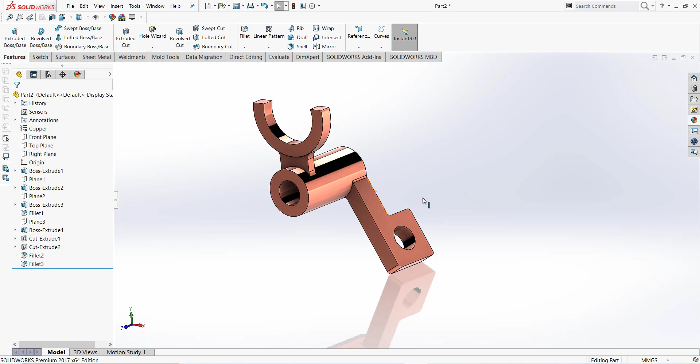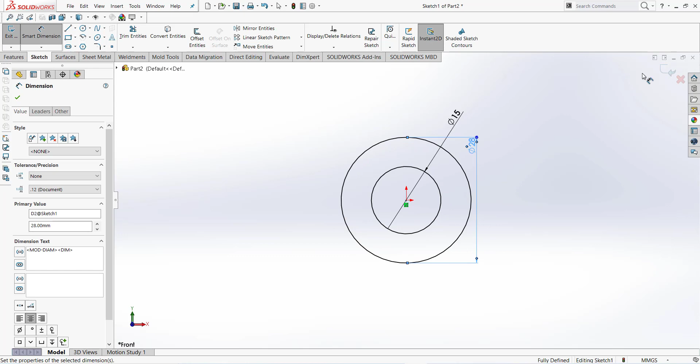So friends, firstly we draw this portion, after that this one, and this portion is our last portion. Kindly note the dimension: this is 28, 15 and 50 millimeter. Just take a plane and draw two circles. Dimension this is 15 millimeter and this one is 28 millimeter. Finish sketch, extrude 50 millimeter. First portion is ready.

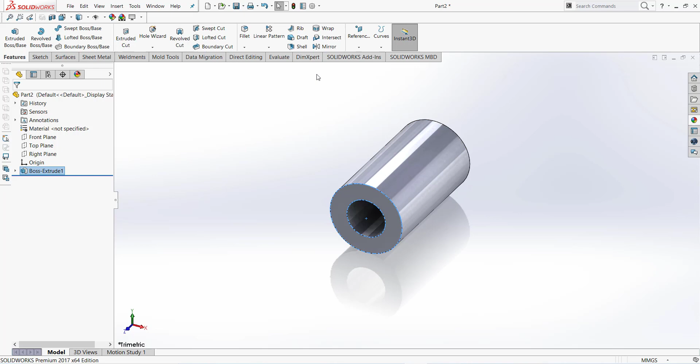Now we are going to make this portion. This is center 45, 50, 35 and 7 millimeter extruded from this portion, 6 millimeter from this face and 5 millimeter from center. Just take a plane, click on this face and take a plane, flip direction and 6 millimeter.

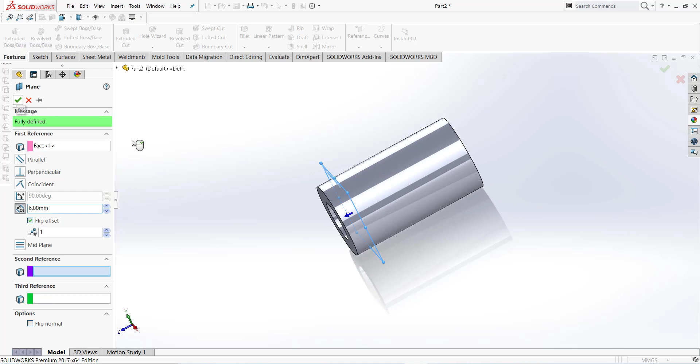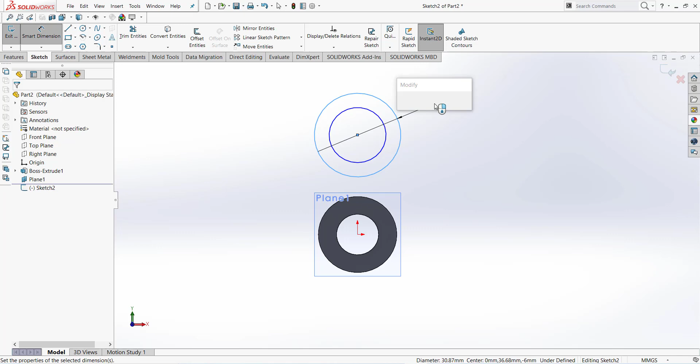Now go to plane 1 and normal to, and take sketch and draw two circle. Smart dimension, this is 50 and this one is 35. Center distance is 45 millimeter. Now draw a center line, offset 5 millimeter upper side.

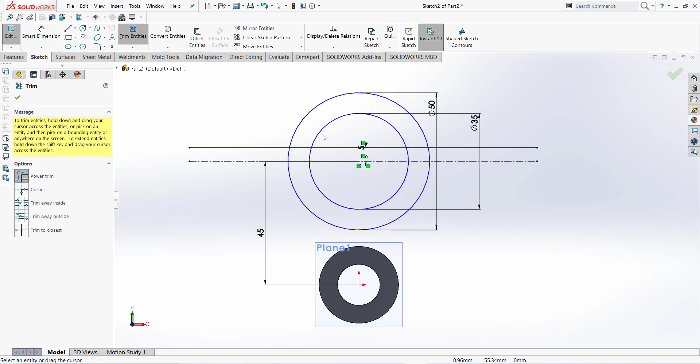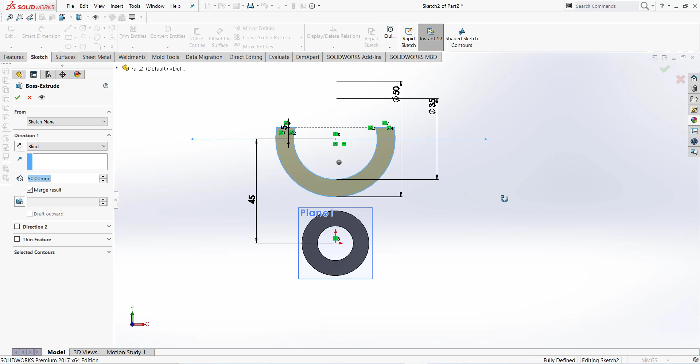Now go to trim the extra portion. We have to fix this, should be vertical. Finish sketch and go to extrude, flip direction and distance is 7 millimeter.

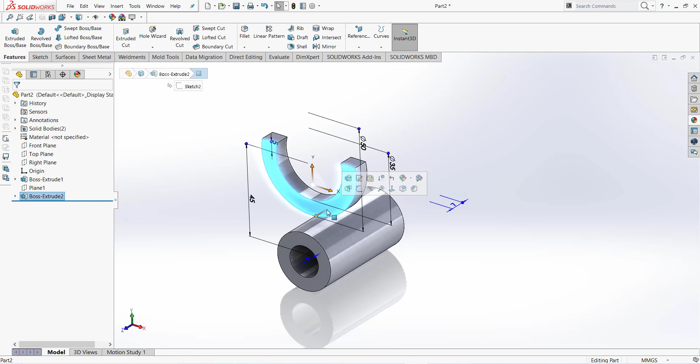Now we are going to make this rib. This is 5 millimeter thickness, so we have to take a plane. Hide the plane. First click on this face and take a plane, flip direction 1 millimeter. Go to sketch and click on sketch, click on this plane and convert the entities.

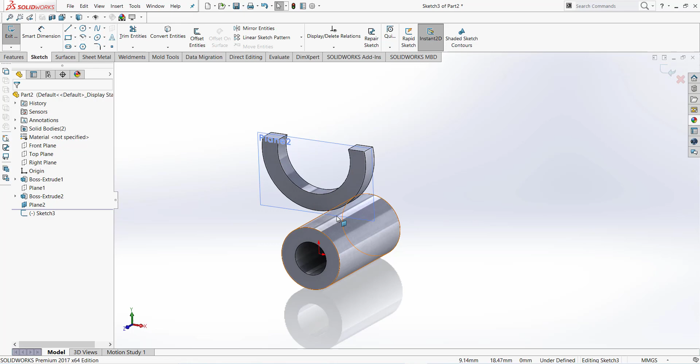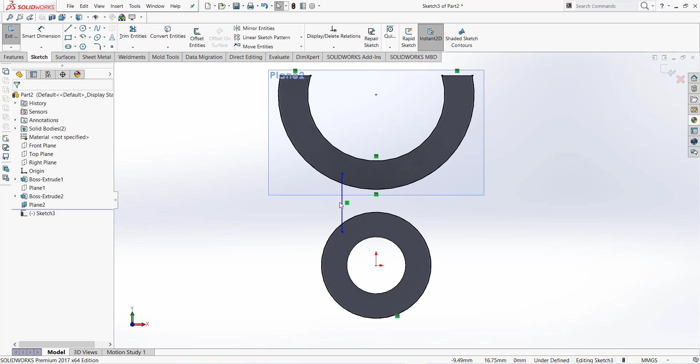First click on both faces and convert entities. Sketch 3 to be normal and draw line, it should be vertical. One more line. Now dimension, this dimension is 10 millimeter and total dimension is 20 millimeter.

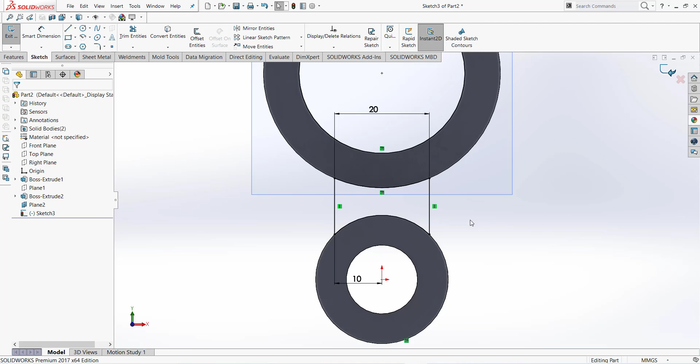Now trim the extra portion. Finish sketch, go to feature and extrude, click on this sketch, flip direction and distance is 5 millimeter and OK. So our rib is complete.

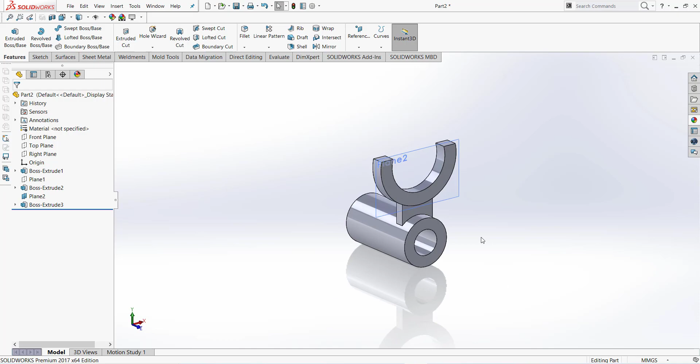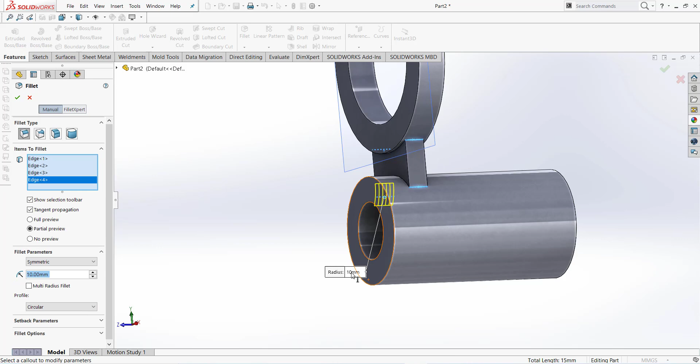Now 5 millimeter radius from both direction, let's make a fillet. Click on this face, this edge and this edge, this and this one. Distance is 5 millimeter and click OK. Now hide this plane.

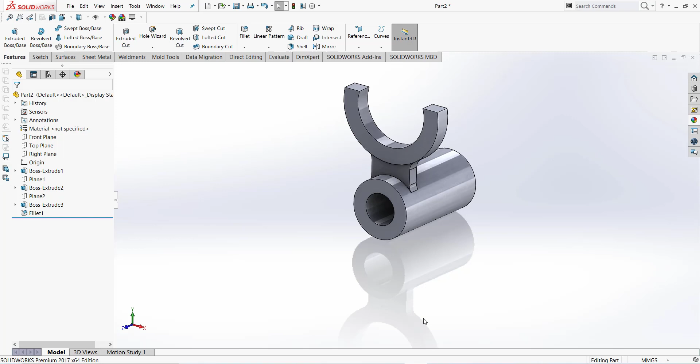Click on this face and take a plane, flip direction and distance is 38 millimeter. Click OK. Plane 3 and normal to.

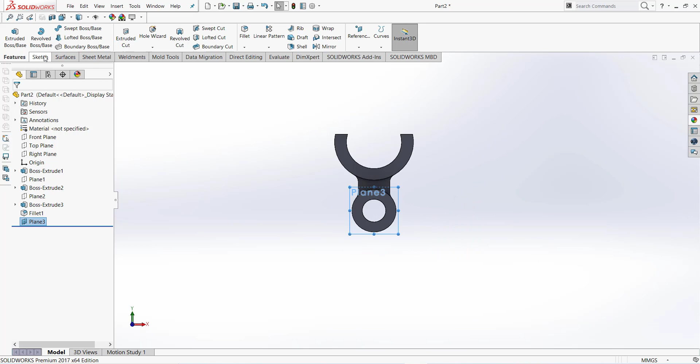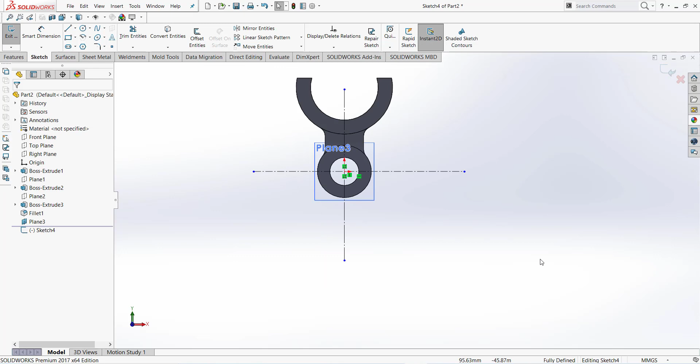Now go to sketch and draw some center lines. One vertical center line, it should be construction. Now one more center line, it should be construction, and the angle from this vertical is 30 degrees.

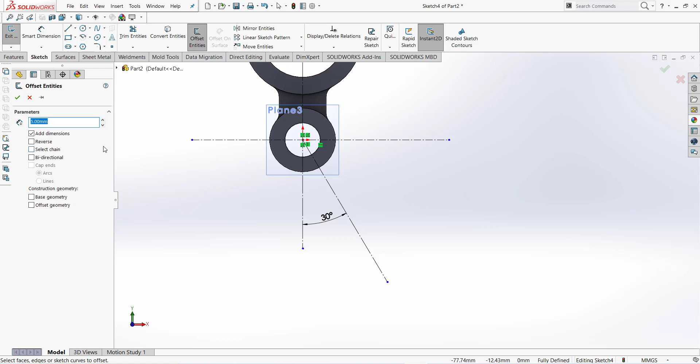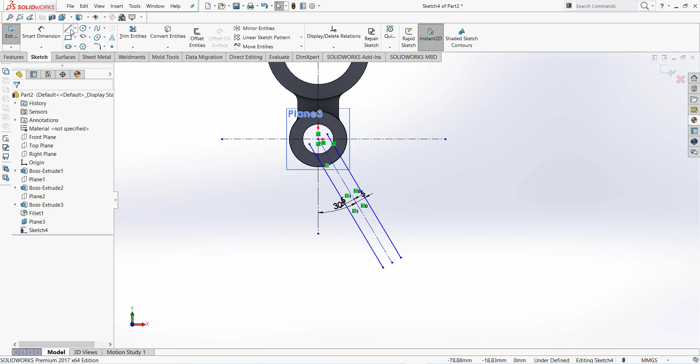Click OK. Now we have to take an offset of 5 millimeter on this side and this side. Now we have to take this face as convert entities and close this portion.

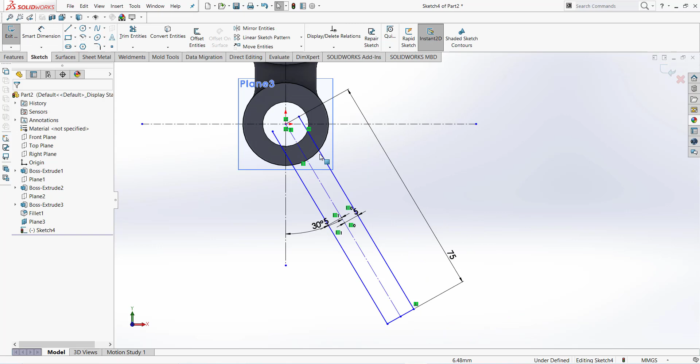Now this dimension from that center is 75 millimeter. Now trim the extra portion. Click OK, and we have to fix this portion. Let's give this dimension and we have to take the 75 millimeter again.

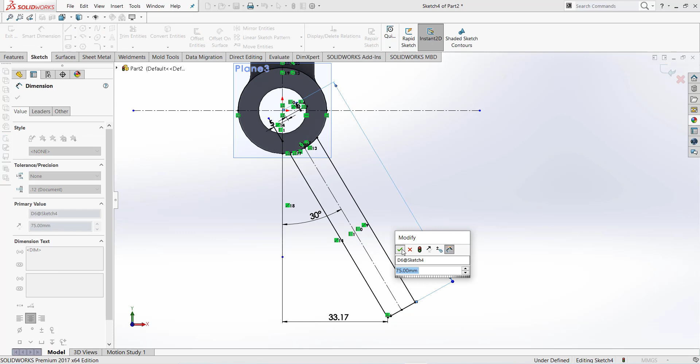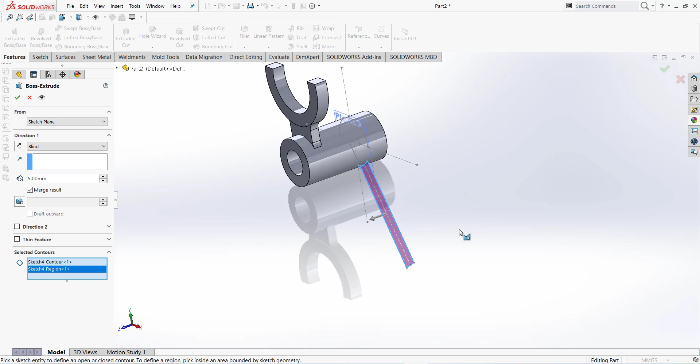Finish sketch and feature and extrude. It should be from this direction.

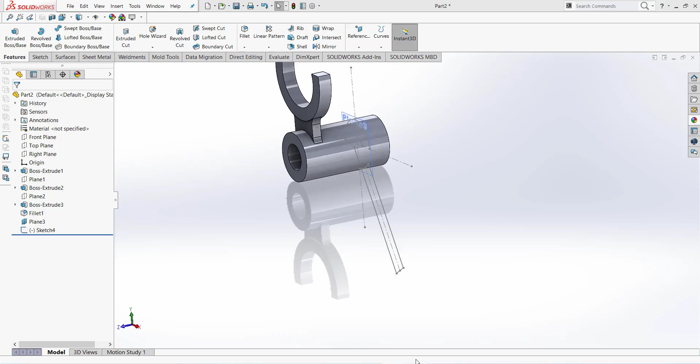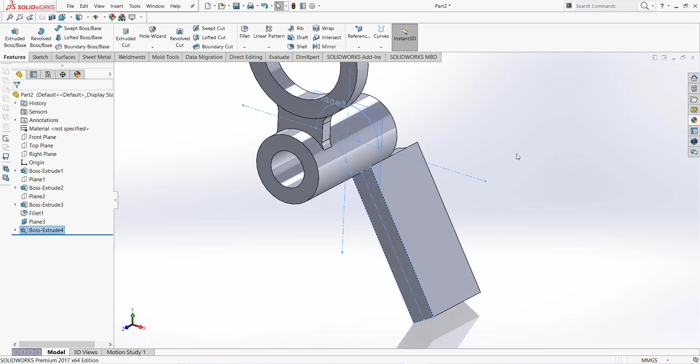Let's extrude again. This is our 30 millimeter, no problem. Extrude, click on the sketch and reverse direction, and this distance is 30 millimeter, and click OK.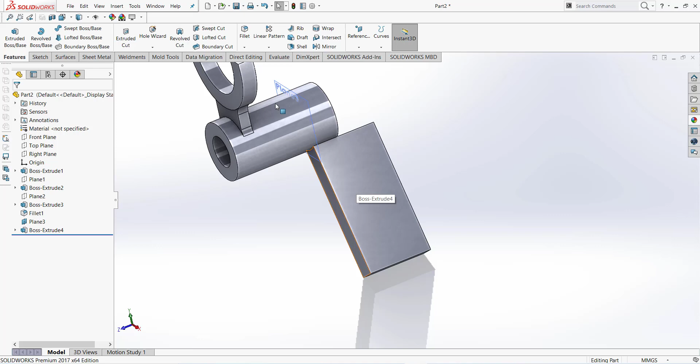Now we have to cut this portion. This is our 12 millimeter, this thickness, and 30 millimeter. Let's hide the plane first. Go to this face and normal to and draw a rectangle.

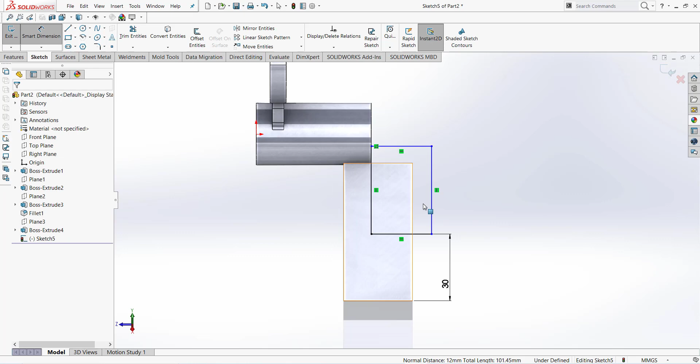This dimension is 30 millimeter, and this direction, this distance is 12. Now finish sketch and feature, cut extrude, and through all.

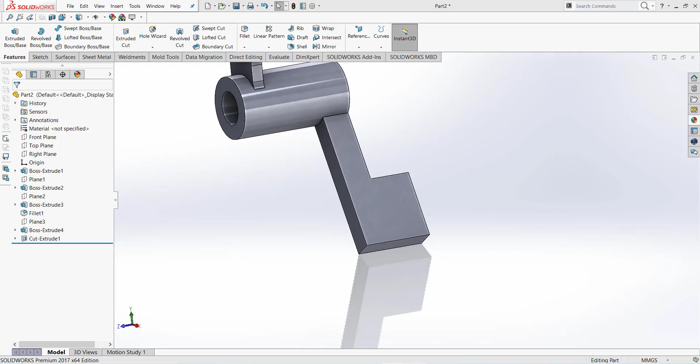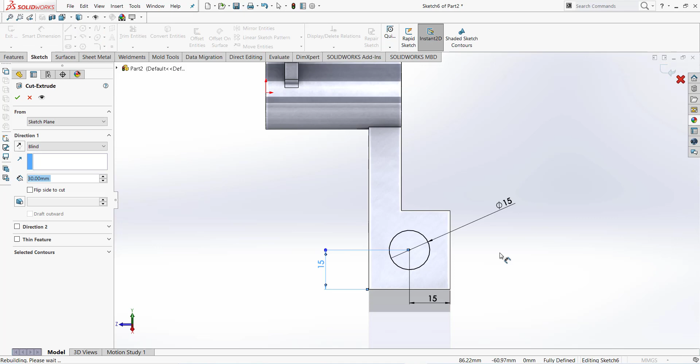Now we have to make the circle 15 millimeter dia, and 15 millimeter from this side. Go to this face again and normal to, take extrude cut and draw a circle. Let's dimension 15 millimeter, 15 millimeter from this side, and from this direction is also 15 millimeter. Through all, click OK.

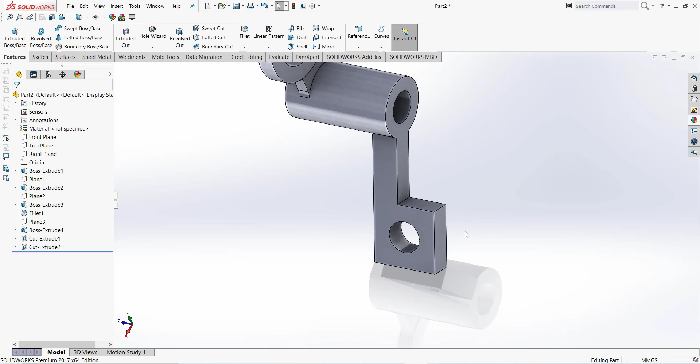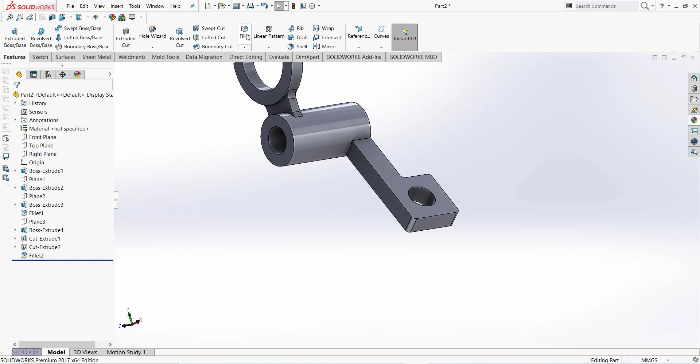Now let's have some fillet 2 millimeter. Go to fillet and click on this edge and this edge, this edge and this edge, and it should be 2 millimeter. This edge and this edge, 2 millimeter.

So our exercise is complete, I think.